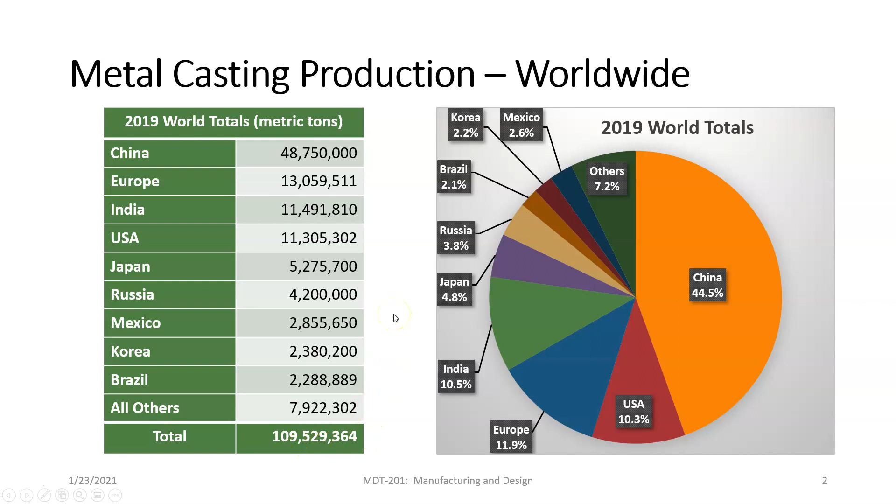If we break it down by the type of metal casting that we're looking at, what's interesting is, and maybe it's not a surprise, iron alloys, which basically we're talking about cast irons and steels, by far are the most cast metals. Gray cast iron is the largest percentage, with nearly 50%, 48.1%, at 51 million metric tons. Ductile and malleable iron come in after that with 23.6 million and not quite a million for malleable or white iron. Then we have steel production. Steel production is still less than half of the nodular iron, a fifth of the gray iron, but it's still substantial, 10 million metric tons.

Then after that, what may be surprising to you is aluminum. Actually, there's more aluminum production than there is steel. This is typically because aluminum casting is going to be for smaller objects, steel is going to be mainly for building materials. But aluminum is going to be for smaller objects, so there's going to be more aluminum production. It's also easier to cast, it doesn't require the substantial infrastructure and equipment that steel does.

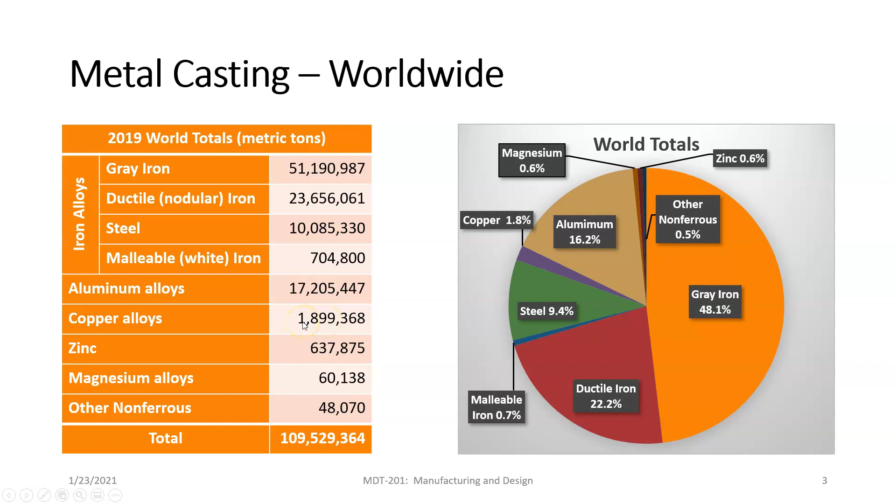That was a little bit of a typo on my part. So you can see there is a slight change here between copper and zinc. That might have to do with the natural resources that we have in other countries. We have quite substantially higher, almost 1.9 million metric tons of copper, and that might be that other countries have larger reserves of copper as a natural resource than the U.S. And so that's why it's not really done here.

Moving on to the casting industry, how do we start to classify the different casting processes? There's a couple of different ways we can classify it, according to your textbook. We can classify it by the types of molds, whether they're expendable or permanent. This is how your textbook classifies it, if you look at the different chapters covered in this section on casting and molding.

We have expendable molds, that is molds that are broken apart and only used once, and then permanent molds. Permanent molds, obviously, as the name says, are going to be reused over and over again until they just wear out.

Types of activities: we have smaller independent shops, and then we have shops that are going to be doing just casting. Types of material: metal, plastic, and ceramic. There's some ceramic casting done, and you might think of plates and dinnerware, ceramic cups, things like that. Those are cast. But for the most part, metal and plastic is where we're going to focus on the types of material.

We can also classify it by the steps that are taken. These steps are pretty straightforward. How do we produce a casting? Well, first we need to prepare the mold. Then we need to prepare the casting material, that is the metal or the plastic. Then we have to get the material, in this case in molten form, into the mold - we introduce the material into the mold.

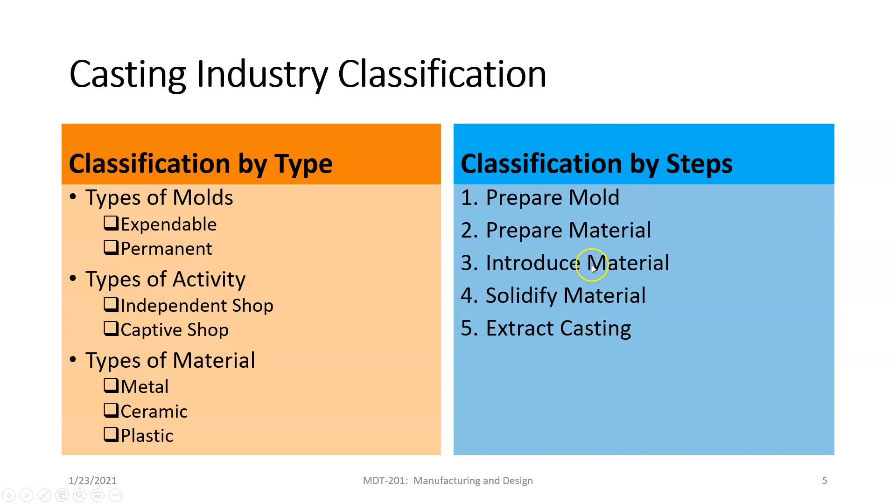Then we allow the material to solidify, and this means it's cooling, okay? And then we extract the cast object. So these are your typical five steps. Not every type of casting operation follows exactly these five steps - especially for permanent molds, we don't have to prepare the mold every time; it's already prepared, and so on. But we'll go through each one of these a little bit more in detail.

So what kind of advantages and disadvantages do we have in the casting and molding manufacturing processes? Well, the advantages are we have a great deal of form freedom. When we talk about form freedom, what that means is we're able to cast shapes that designers design, right? We're not limited in what we can design by the manufacturing processes. So we have good form freedom - it's not unlimited, but we do have good form freedom with casting.

We have good material properties, not great, as you'll see - not as good as forging, where we get much stronger materials - but still good material properties. And the parts retain their strength at elevated temperatures. So a cast part, if it's used in a high temperature kind of environment, it's going to retain that strength at the elevated temperatures.

What are some challenges that casting has? Well, it's a very low volume production process, especially the expendable molds, like they're doing in this picture over here. This is a sand casting operation here. Having to prepare the mold every time, having to break the mold apart to get to the part, this greatly slows down the casting process. So low volume - we just can't do a high volume casting.

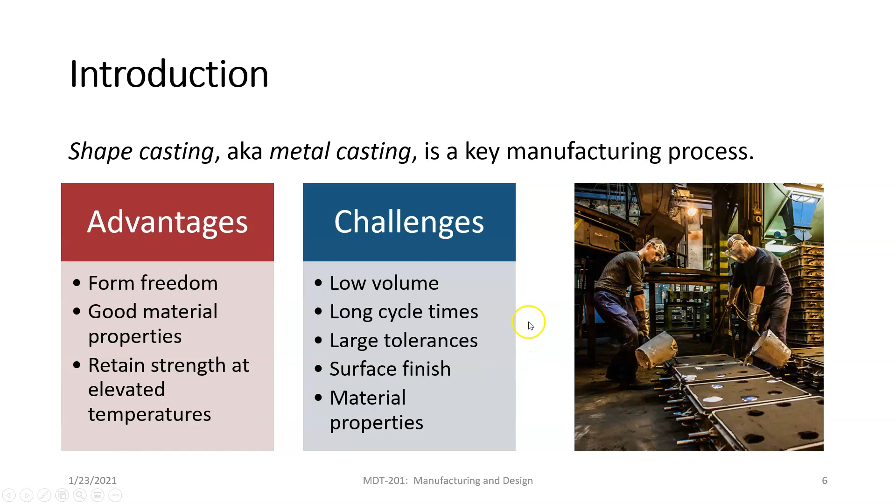Let's look at the different casting metals. Common casting metals are iron, aluminum alloys, magnesium alloys, copper alloys, tin, and zinc. Notice that steel is left off here - we'll talk about that later. This is an example of a large sand casting, over 1,500 pounds, quite a large piece.

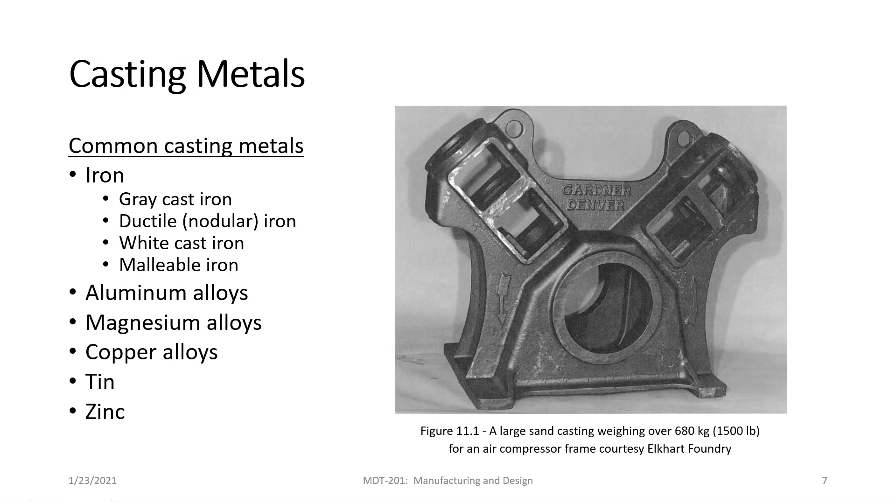Iron we can break down further into four main types: gray cast iron, ductile or nodular iron, white cast iron, and malleable iron. Each one of these has different material properties, and that's why we have a breakdown in the different irons.

Looking at the breakdown of these, gray cast iron is very corrosion resistant. It has high temperature resistance, but very poor ductility. What that means is when you bend it or try to bend it, it's just going to shatter or break - it's not very flexible. I know it's difficult to imagine a metal being flexible, but aluminum, if you take a piece and bend it, has high ductility. Ductility plays an important role because we want our metal parts to not shatter when they are used, and gray cast iron is not going to be an option there.

How do we make gray cast iron? This is the most common type of cast iron, and the alloy itself is 95% iron, basically between 2 and 4% carbon, and a little bit of silicon - 1 to 3% silicon. The name is derived from the grayish color that it has, that's why it's called gray cast iron.

White iron has high temperature resistance again, and high strength, but again poor ductility. So white iron's difference from gray cast iron basically adds a strength bonus - it has higher strength. How do we make white iron? When we take iron and cool it rapidly, that locks in the carbon into the iron matrix. So gray or ductile iron can be chilled to produce a surface of white iron.

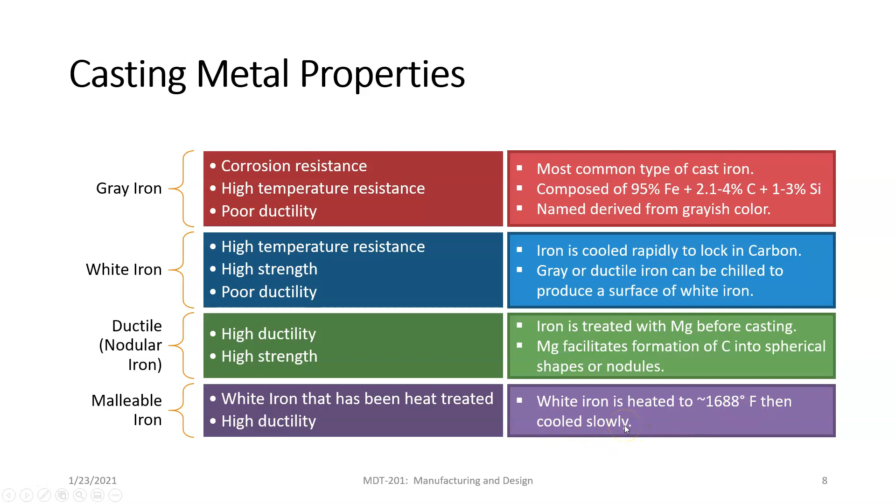All right, so those are some of your casting metals. So let's see how the casting process is done. There are two main types of casting processes, and here we're talking about pouring a liquid metal into a mold.

The two main types: first, a top-down process, where we're pouring the liquid metal in through the top, and it fills up from the bottom up. Then we have the bottom-up method, where we're pouring in the liquid metal and it fills a reservoir, and it slowly fills in from the bottom up. So this is a bottom-up method and a top-down method.

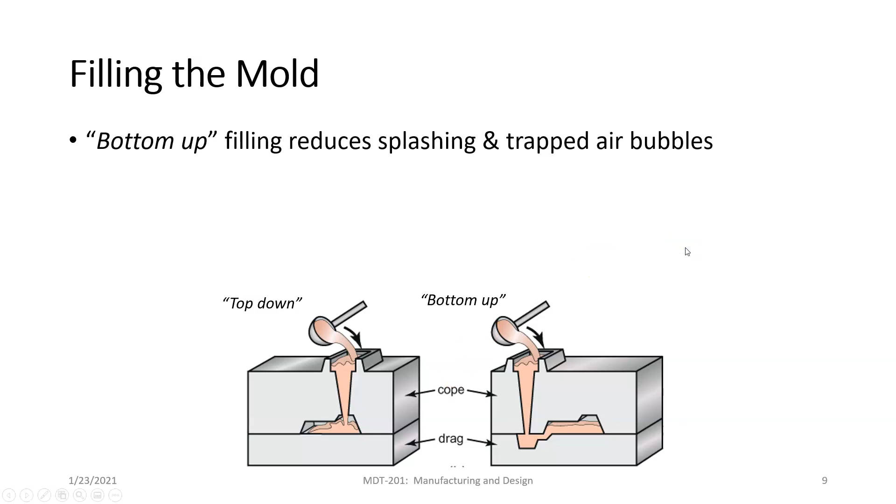Both of them have their benefits and negative aspects, and we're going to look at that in a second. The bottom-up filling reduces splashing and any trapped air bubbles. Bottoms up.

But what the splashing does, why we want to get rid of it, is splashing increases the liquid surface area. When a liquid is splashing, all those little bubbles that are formed, all those splashes, increase the surface area around that part. Surface area in iron is going to allow oxidation. Oxidation is a fancy word for rusting, and believe it or not, the rusting happens that fast, and rust is bad. So we don't want rusting, we don't want oxidation to occur, and increasing the surface area increases the oxidation, which is bad.

As I said, oxidation negatively affects the material properties. For example, it can affect ductility. That means oxidation can make a part less ductile.

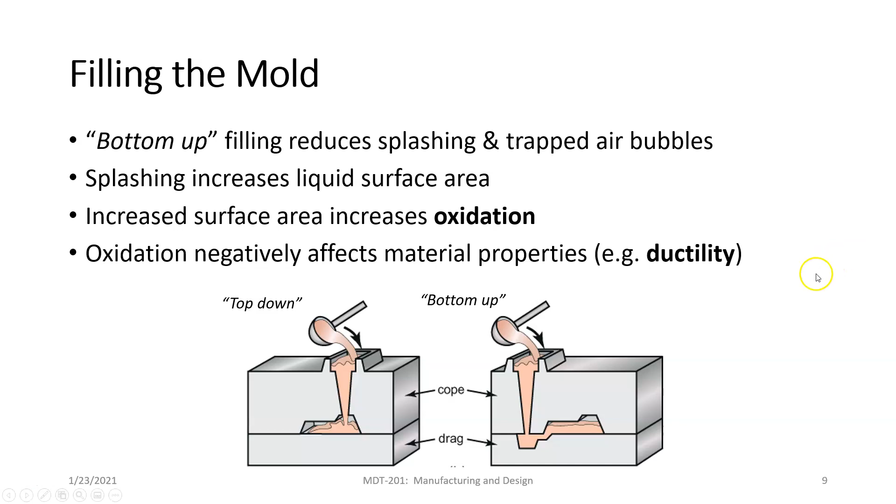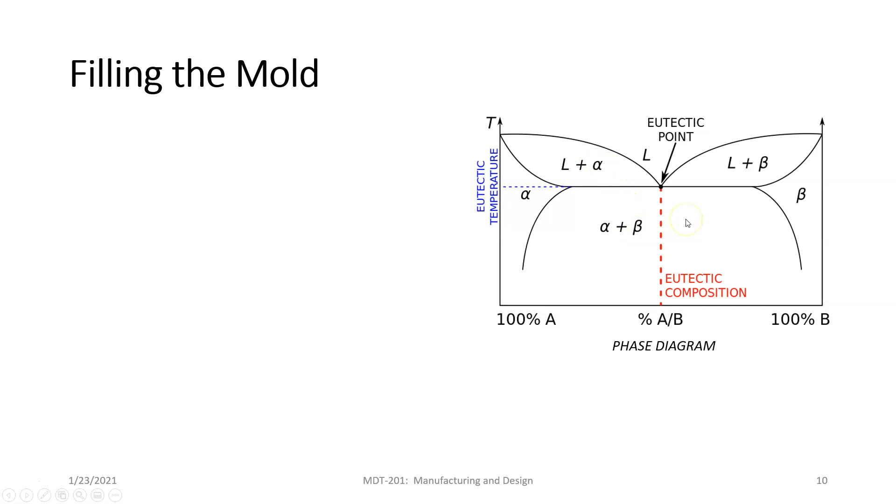Then what you do when you identify that percent of A and B, you can predict how the material is going to solidify. We start up here with a material that has this composition. Imagine a vertical line going straight up at a high temperature - this is all liquid. As the part cools, it drops down through these different regions, which identify where different parts of that metal solidify out. The L indicates liquid, and the alphas and betas indicate the solidifying component. That was kind of a quick glance at it, but we'll talk about that more.

Low viscosity metals will fill the mold details much better. Low viscosity, think of syrup - if we're filling a mold with syrup, because it's moving in slowly, it's going to fill all the little nooks and crannies very well. So we want that. But the downside to low viscosity is it fills slowly, and when a molten metal is filling slowly, it's going to start to solidify because it's so slow.

So alloying elements always lower the viscosity - the percent of alloying elements helps lower the viscosity. Steel has 0.2% to 0.6% carbon, so it has a relatively high viscosity. Cast iron has 2 to 4% carbon, so it has a low viscosity. More carbon indicates lower viscosity, more syrupy.

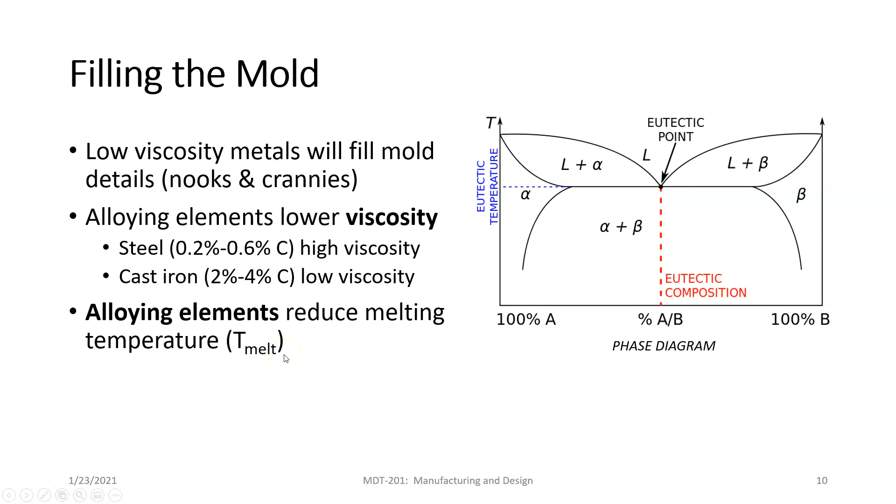Alloying elements reduce the melting temperature. So the more alloying elements that we have, the easier it is to melt. It melts at maybe 1,000 degrees versus 2,000 degrees as a pure metal.

So the eutectic composition is the composition of the metal plus the alloying elements, resulting in the minimum melting temperature. The eutectic composition right here represents the minimum melting temperature.

Remember, L represents entirely liquid. Everything is liquid. So there is a point in every material eutectic diagram, a perfect percentage of alloying elements and base metal where it meets right at this intersection. That point is the lowest temperature where everything is going to be liquid.

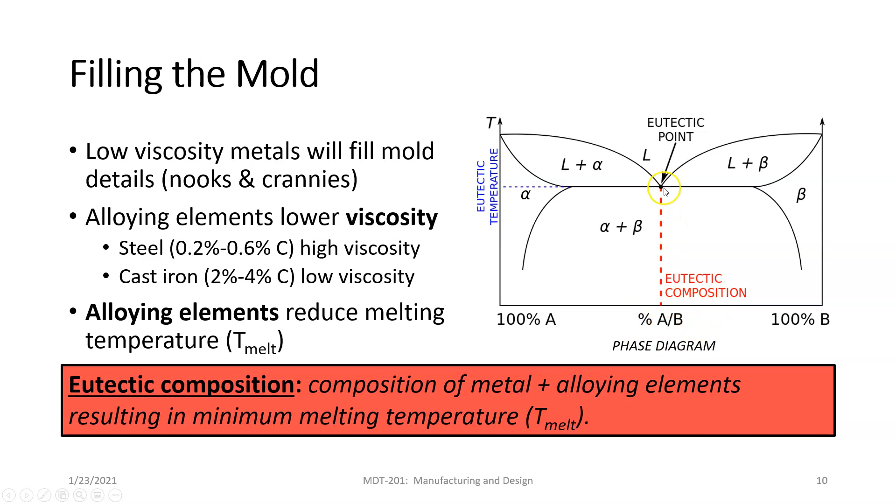If the temperature is any lower, we're going to have some solids in there. So that's called the eutectic temperature. And the eutectic composition is the ideal alloying percentage with our base metal. This point is called the eutectic point.

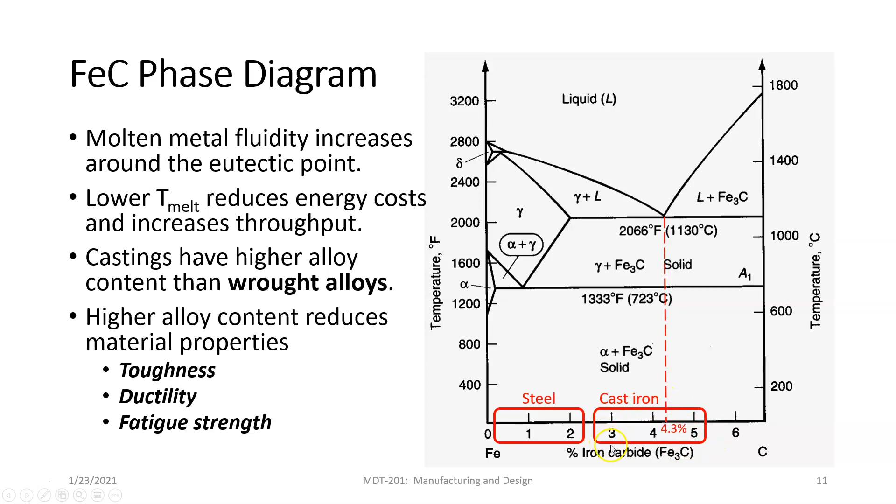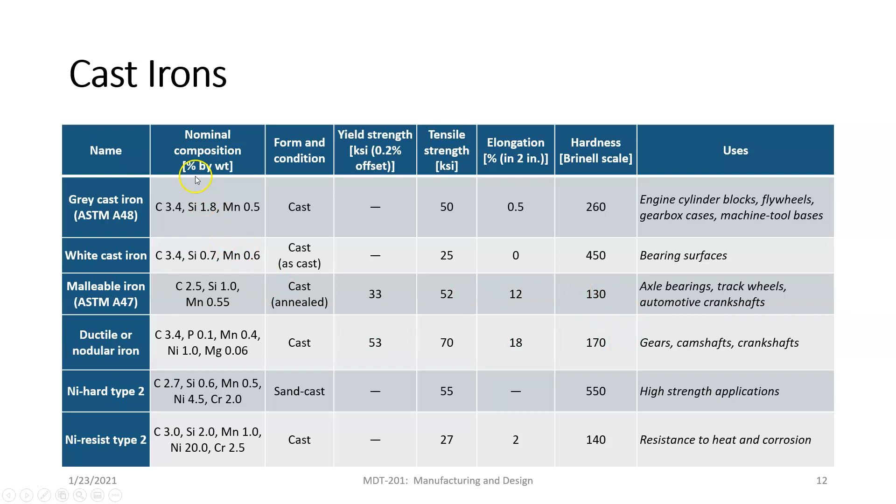So let's talk about filling the mold. We'll focus on filling the mold here with the flow of the liquid metal. High-speed filling - we're pouring it in, maybe a top-down approach. The mold fills quickly, and we get more turbulent flow, meaning there's more splashing.

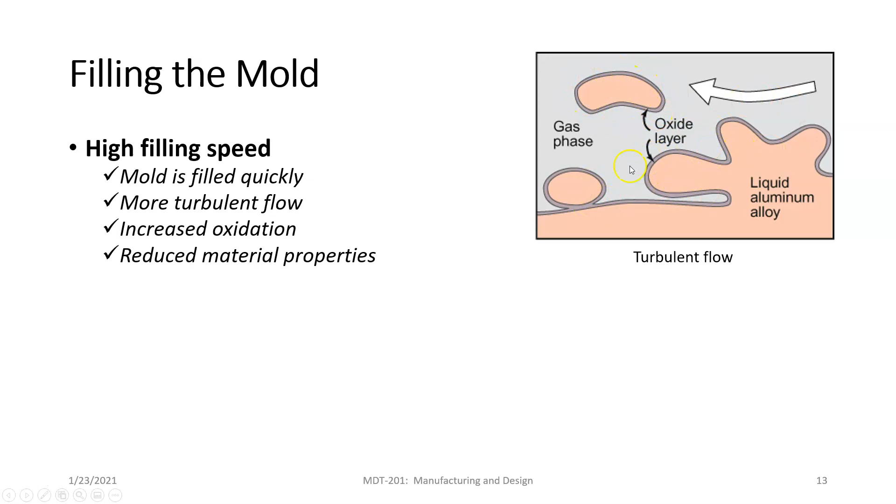But because we're slowing the filling down, the solidification may occur prematurely. That is to say, while it's filling up, some of it may start to solidify, which is definitely not good.

Laminar flow is basically the term we use for the opposite of turbulent flow. Laminar flow is very smooth flow. We get no oxidation or very little oxidation, and therefore we get improved material properties.

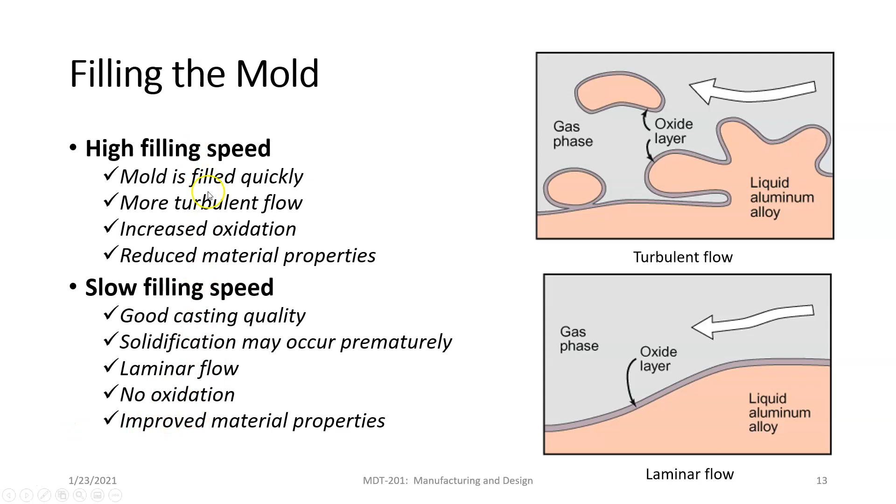Again, I want you to understand that there are trade-offs. That's the main thing you want to understand. So what are these trade-offs? Well, flow begins laminar, but after a critical flow length, it turns turbulent.

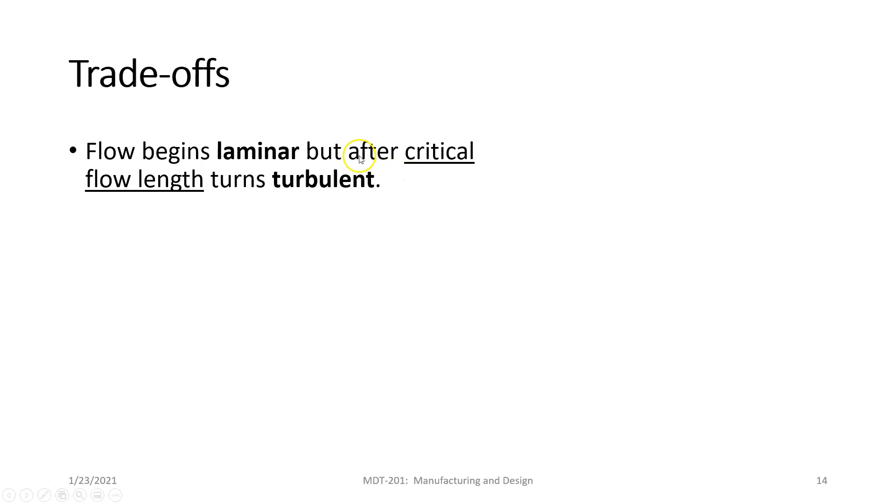Now this is important to understand. Unfortunately we're in the winter so it's hard to do this, but if you go out with a water hose and turn it on, there's going to be a period where the flow is laminar or smooth. Then after a certain point of the water running, it's going to turn turbulent. This happens after what's called the critical flow length, and we can actually calculate what the critical flow length is. We're not going to in this class, but you can calculate it.

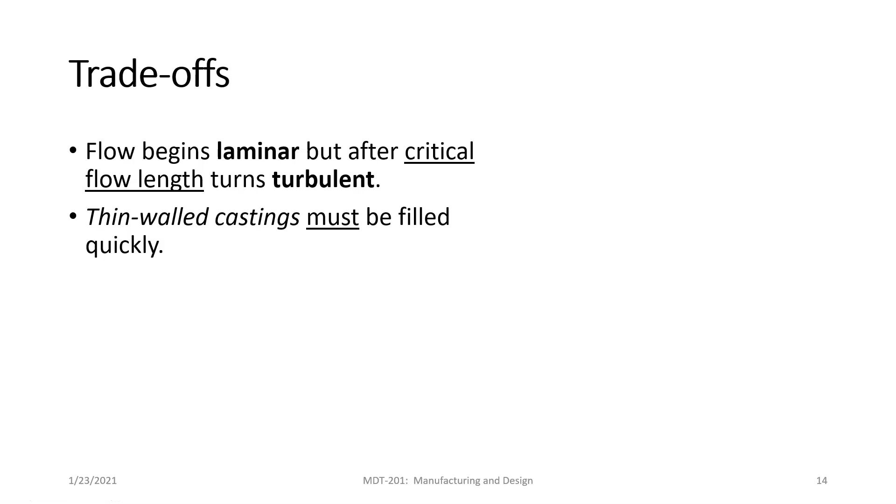Some other trade-offs: thin-walled castings must be filled quickly. This makes sense because a thin wall is going to solidify quicker than a thick wall or thick part. A thin wall allows heat to dissipate more quickly, so it's going to cool and solidify quicker. We must fill them very quickly. If we fill them slowly, they're going to solidify prematurely, and then we're not going to get a good part.

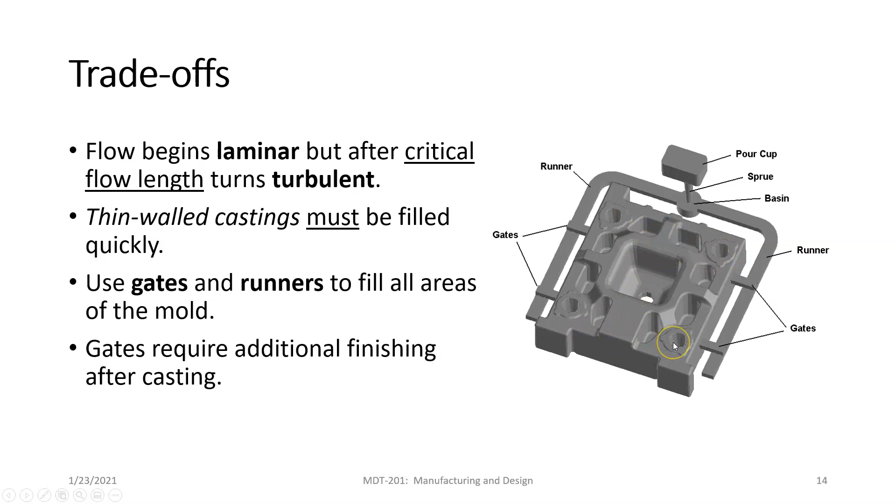But the downside is the fewer gates and runners, the harder it is to fill the mold so the part is properly solidified. Again, thinking back to a theater, if we only come in through one entrance, it's going to take a long time for the theater to fill, because everybody's going to want to sit down here and may not want to go all the way to the front. This allows an entryway to the front of the theater.